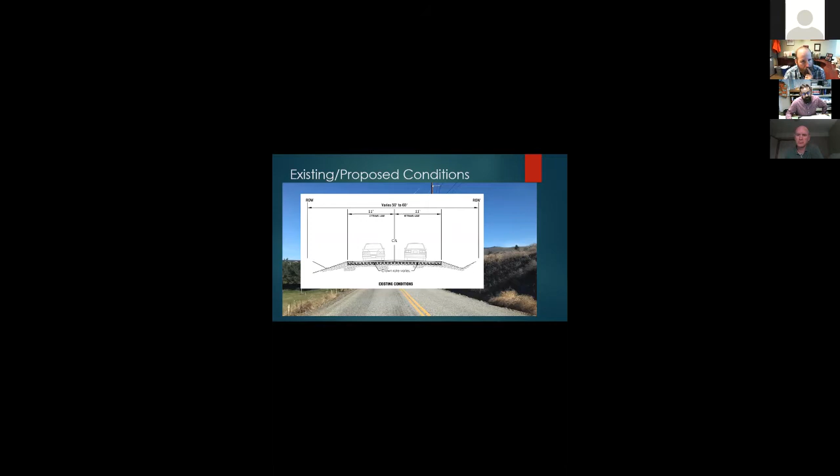The proposed roadway is going to have 5-foot shoulders in addition to the 11-foot lanes that are out there now, and sidewalk on the west side of the road. Those 5-foot shoulders can also be used as multi-use bike access. And in the roadway, we're going to install the sanitary sewer and the storm sewer.

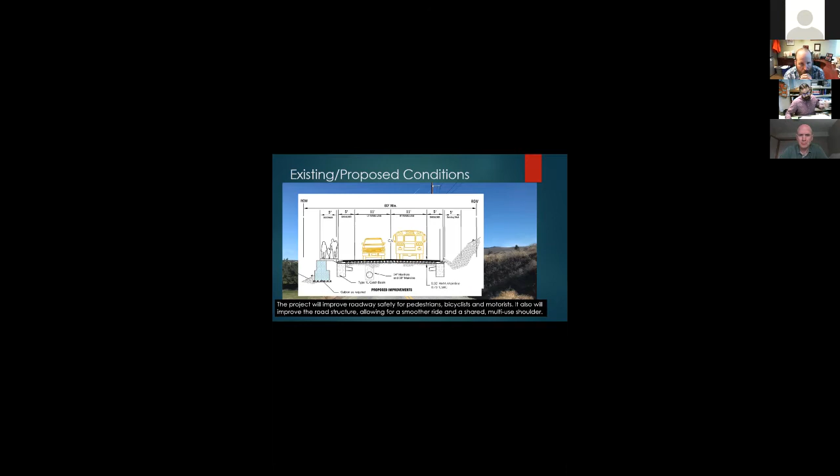So with the domestic water line getting replaced, I'm going to hand it over to Courtney to go over those details for what the need is and what the impact's going to be.

As part of the project, we'll be replacing approximately 1,400 feet of existing 4-inch steel water main with about 2,200 feet of 8-inch ductile iron water main.

Obviously the timing's perfect for the replacement of the steel main, which is at the end of its useful life, to do as part of this bigger project. The new 8-inch main will increase the capacity and reliability of the water system in the area, and will also improve fire flow, including installing 4 new hydrants and replacing existing customer connections, as well as preparing for some future development through the corridor.

As part of the water improvements, there will be water outages for the connections on the new main on both ends of the project. This will require connection to existing main, and then of course for the customer service lines there'll be temporary outages as well. We typically hang door knockers prior to the outages to inform customers when the water will be shut off.

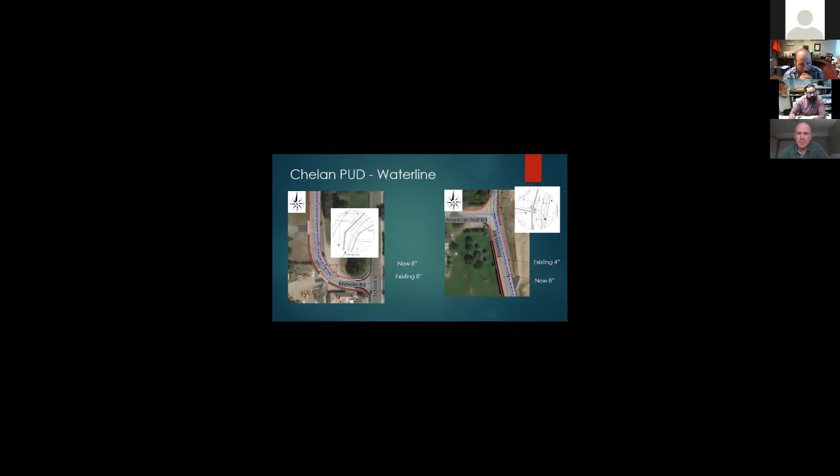Thanks, Court. I'm going to switch it over to Jeremy with the sanitary sewer improvements. Thank you, my name is Jeremy Hoover, I'm with the City of Wenatchee Utilities Department, Public Works.

We're going to be installing side sewers for the existing lots as they are currently platted, and leaving stubs out for future extension for the subdivisions that are currently known.

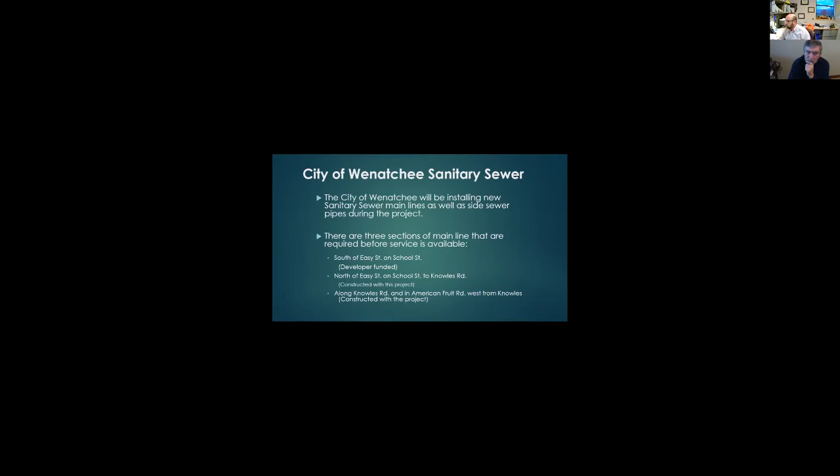West of the intersection, there will be an 8-inch stub left for the two known developments that we have on the west side of the road, as well as at Majestic Lane, so that sewer could be extended up the hill at some point in the future.

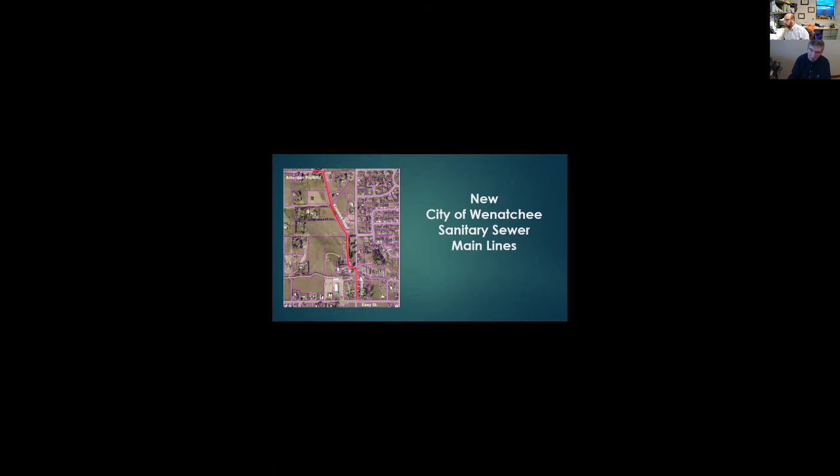Residents connecting to the city sewer system would have to establish a billing account with the city. That can be done at 1350 McKittrick, the Public Works building, once the sewer becomes active. The customer will be responsible for paying the connection fees, which include system investment fee, local facilities charge, and inspection fees for the connections.

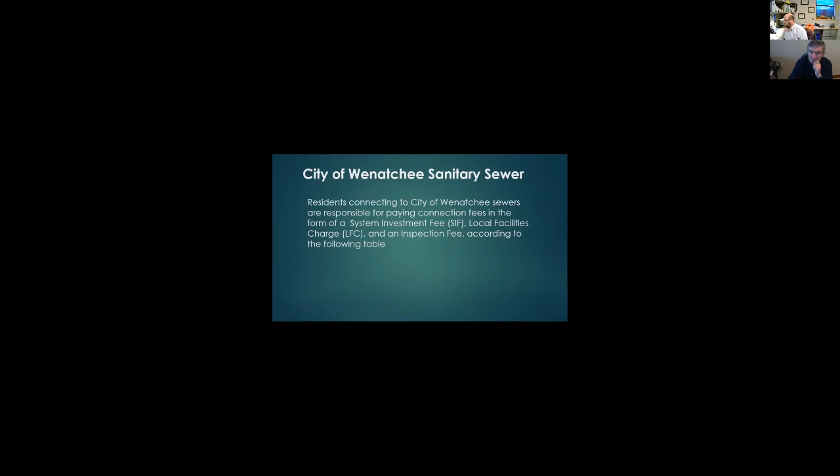The fees are structured so that there's a discount available on the local facilities charge. That discount is available for customers with existing homes on septic systems who wish to connect to city sewer within 2 years of it becoming available. There's an additional local facilities charge for areas north of US 97, called the Sunnyslope Local Facilities Charge, which pays for existing downstream infrastructure the city has installed in the last couple years, including lift stations and the such.

There are rate increases worked into the city code at present. The local facility charge is currently set to increase by 1% per year, and the monthly sewer bill for 2022 will be $33.29, approximately 6% over this year. That rate will go up again in 2023 and continue based on the ordinances in effect at that point.

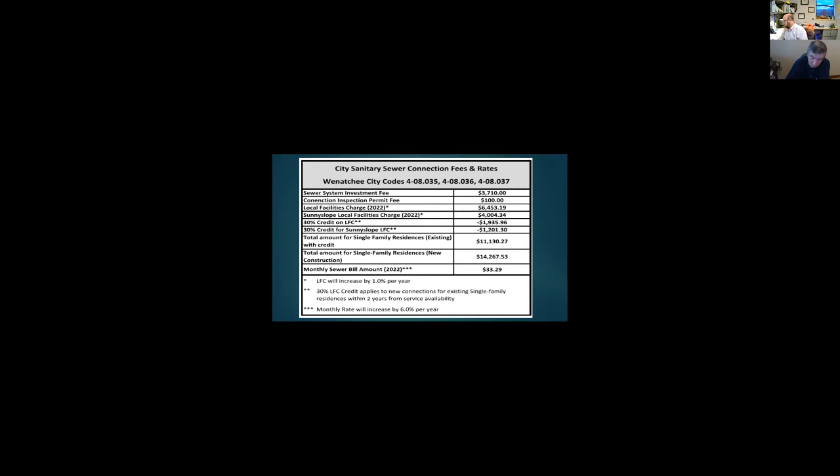The total values for connections for existing versus new construction are also shown here, with and without the discount: $11,130.27 versus $14,267.53. So you can see there's a significant benefit to connecting early once it becomes available, but you would also have to decommission your septic tank in accordance with the health district's regulations when you hook up.

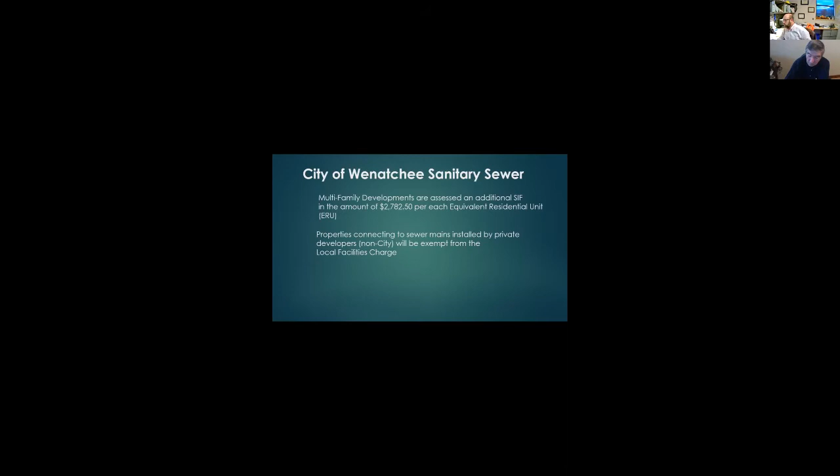Multifamily developments, we don't have any specifically at this point in this corridor, but if there do turn out to be multifamily developments, they are assessed additional system investment fees in the amount of $2,782.50 per equivalent residential unit in the property. If the densities or developments in this area change, the multifamily assessment will be utilized to determine the fees of whatever multifamily development happened in this area.

The city council is currently looking at changes to the sewer rate structure, section 4-08 of the Wenatchee City Code. There will be amendments heard by city council on November 18th of this year, and they'll decide whether or not any changes will happen to the code at that point. It will affect monthly bills, future increases to monthly bills, and the way connection fees for multifamily residences are assessed, plus anything else they choose to change.

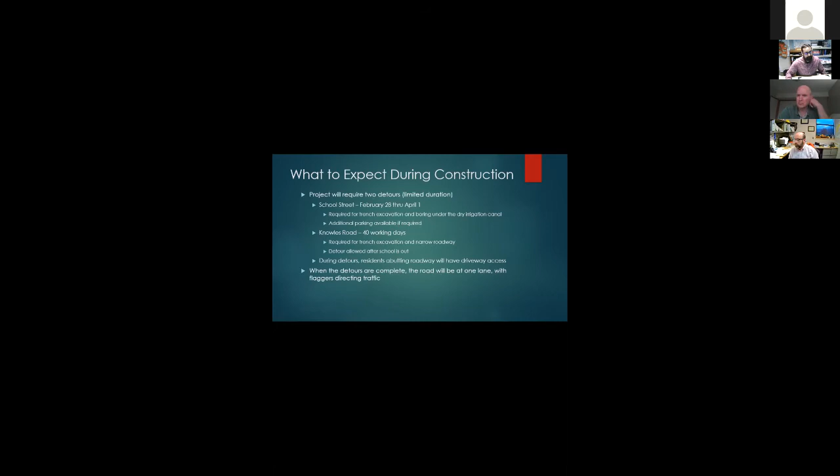I was looking at the trench excavation. So when the contractor goes in there to put in these sewer systems and stormwater systems, it's all based on gravity systems, and we need a certain percentage to have all that stuff flow downhill. So it's going to require some excavation.

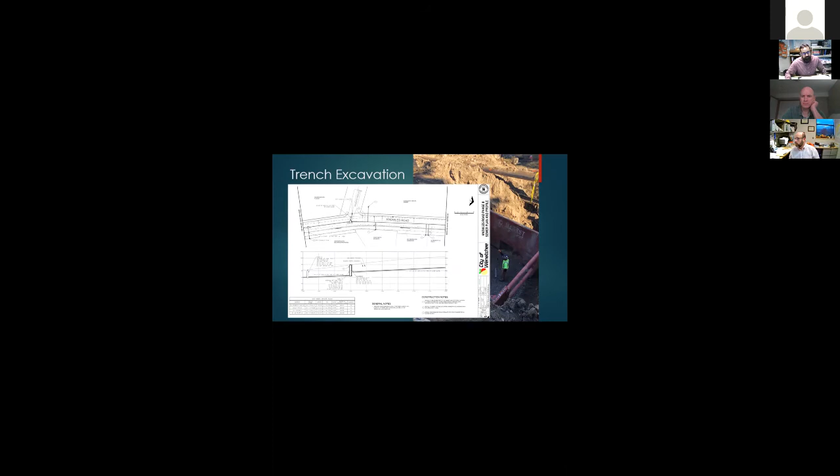It's kind of a preview of one of the deeper trench box locations, up to 20 feet deep. Just to put that in perspective on the roadway, if you're going down 20 feet, with all the contractor's equipment out there, shoring, spoil piles, all the pipe material, it's not really feasible to have traffic allowed on that roadway when that work's occurring.

The good news is they do the work in sections, so they'll lay the pipe and backfill it as they go, but they're going to take up most of the roadway to achieve that work.

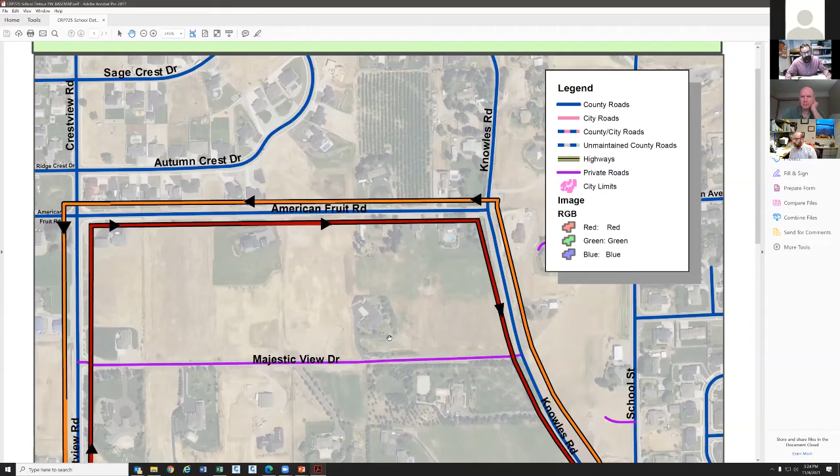So here's the proposed detour layout. I'm going to share my screen. You guys see that map overview? Yeah.

So this is going to be the School Street closure. When we do this work from Easy Street up to Knowles Road, we're going to route traffic around Easy Street, up Crestview, and American Fruit Road. So if you live on School Street, the roundabout way is American Fruit Road to Knowles Road and back up to School Street.

This work runs February 28th to April 1st. The overall detour length is 1.8 miles. If there's parking required, in addition to if you're adjacent to that work area on School Street, we're going to have some additional parking at the intersection of Knowles Road. And we're going to leave the sidewalk facilities open during construction also.

The intersection actually will not be night work. We're going to do 2 days of intersection work on Easy Street, but off peak, from 9 a.m. till 2 p.m. for 2 days, just to tie into the new manholes there.

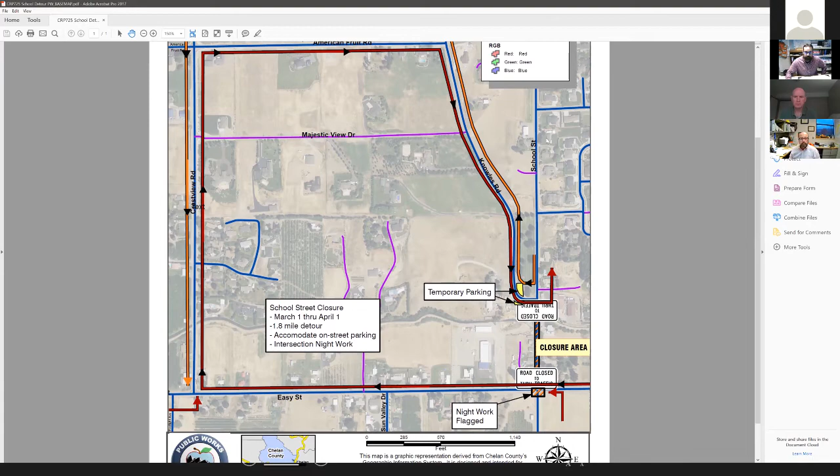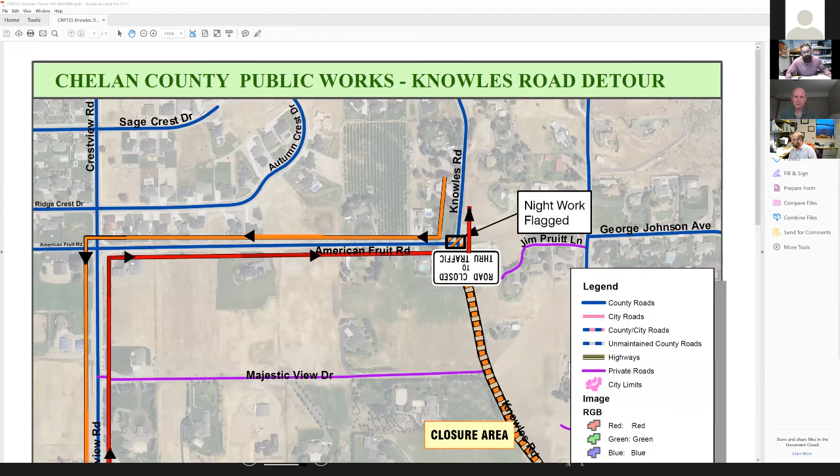So that's the School Street closure. Knowles Road is pretty much similar to that, basically the same impact, 1.8 miles detour. It's a longer closure area, obviously, from the intersection of School and Knowles up to American and Knowles.

As they work up here, they'll open the trench and backfill it at the end of the day. We'll coordinate with all the landowners who have access off of Knowles Road when we'll be in front of their driveway, and we're going to limit how long you'll lose access to your driveway.

You'll know in advance with door hangers. There'll be an impact where they're laying the pipe, but we'll backfill it at the end of the day so you can still access the driveway.

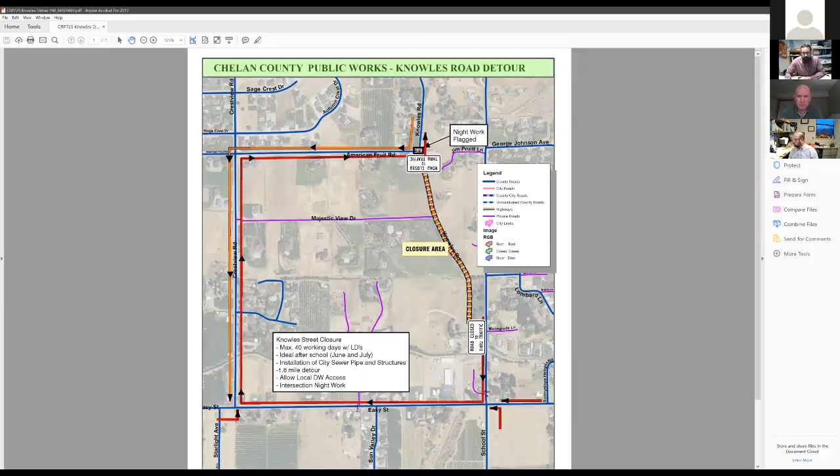So we can take questions at the end too about those impacts, but back to the slideshow. Too many screens going on here. Give me one second. Okay.

So during construction, obviously you have the impacts to access and driveways that we're going to coordinate. As far as emergency services, mail delivery, garbage pickup, school bus routes, all that stuff will be coordinated through Public Works and the contractor, giving all the notices on when those impacts will be in place, and giving you project updates as we proceed.

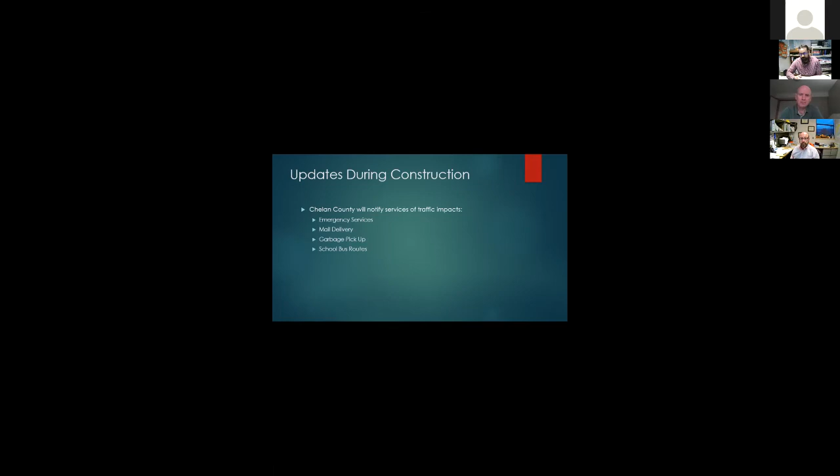So those are the main points for what the impact's going to be. We can take specific questions. I'll let Jill handle that related to the Knowles Road project.

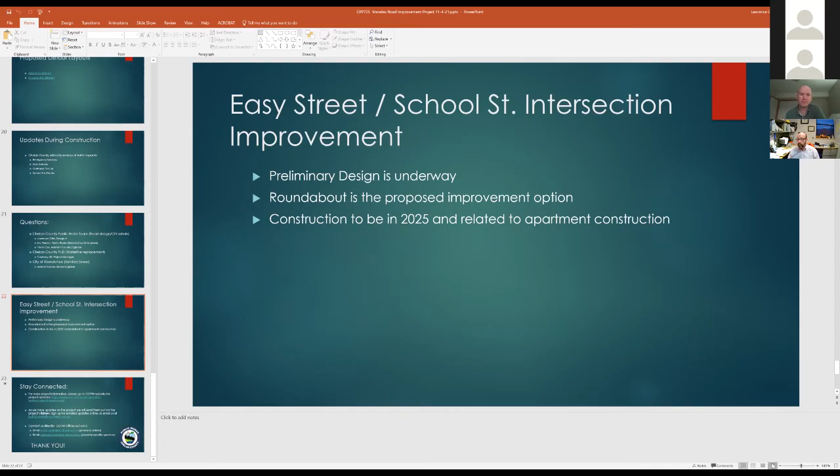I think everyone will agree we'll be very happy when we can actually be in a room to talk about these things. I don't see the share. There it is. So can you see my screen or not? I can, you just need to start the show again. You see that? Yeah.

That works. So we have been receiving a couple calls, obviously with the apartment complex going in on the west side of School and Easy. So I'm just giving a real quick update on that.

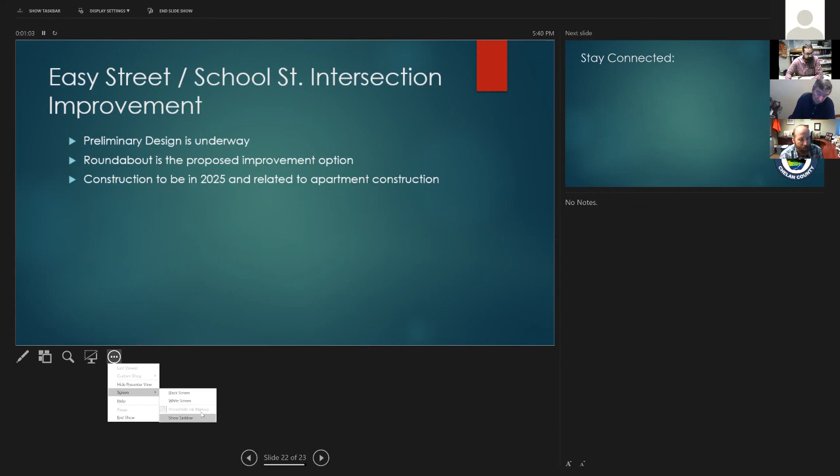Going through the SEPA process and everything with the project, we worked with the developer on that. For those that aren't necessarily familiar, they plan on building an apartment complex on the west side of School Street, right at that intersection. Given that, they did a traffic analysis report to see what sort of impacts their additional volumes will actually cause. We've negotiated with them, and they're going to be dedicating right of way for an intersection improvement, which will be a roundabout that we're planning at the intersection of Easy and School. On top of that, they are paying some mitigation payments for their impacts. It's one of those where by law, and rightfully so, we don't say you have to build the entire thing, because there is a base level of traffic that's actually impacting that roadway as well.

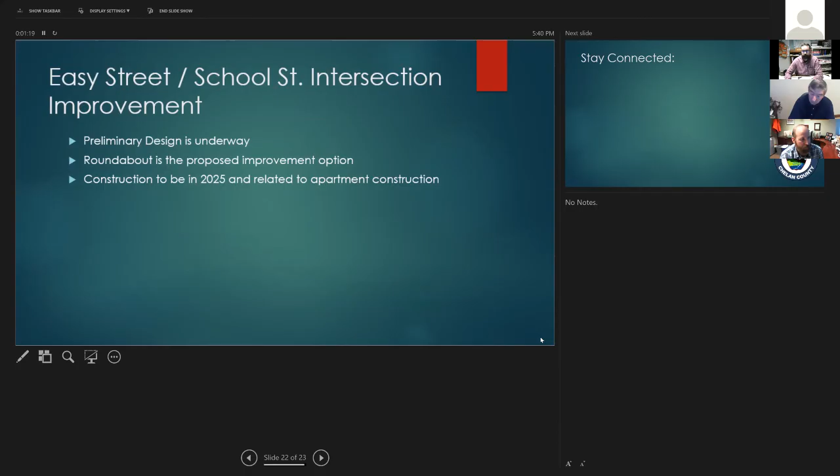So what our game plan is, we're already doing some preliminary design and survey work on it. The estimated amount is around $1 million to do the roundabout. We'll be receiving roughly about 170 from the developer, so we're going to be going out for additional grant sources to get those funds. We'll be looking, it'll probably be tentatively about 2025 when we'll actually be building that. Partly just from going through the design, if there's any additional right of way needed from other parcels, which would be somewhat minor, and also as far as securing the additional funds for the grants.